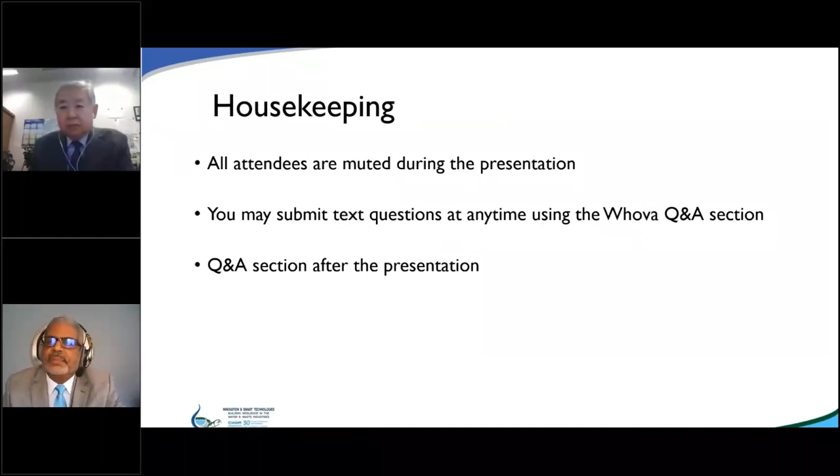Dr. Han, you may now turn your microphone and webcam on. As I see your webcam is on, and you may start your presentation. Many thanks, dear Mr. Williams, for introducing me. Dear participants of the Caribbean Water and Wastewater Association Conference, greetings from Vienna. This is Mr. Bumsoo Han, Radiation Chemist of IAEA. It is an honor and pleasure to present these recent activities of IAEA on wastewater treatment by radiation technology.

So the International Atomic Energy Agency is the world's central intergovernmental forum for scientific and technical cooperation in the nuclear field. It works for the safe, secure, and peaceful use of nuclear science and technology, contributing to international peace, security, and the United Nations Sustainable Development Goals.

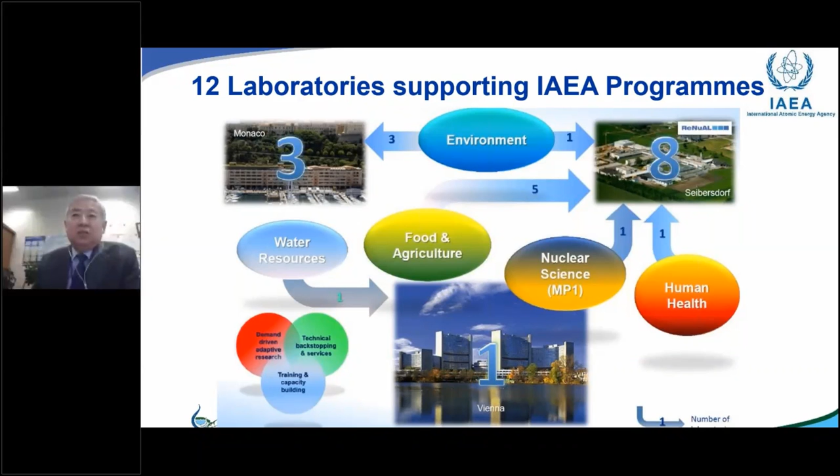The IAEA maintains 8 nuclear application laboratories in Seibersdorf, Austria. They support and implement activities that respond to the development needs of member states in a range of subject areas, conduct applied research and development, deliver training and capacity building to member states, and provide technical and analytical services. The Division of IAEA Environment Laboratories comprises three separate laboratories that together constitute the IAEA's environment laboratories in Monaco. They use nuclear and isotopic technologies to understand and propose mitigation strategies and tools for the environmental impacts of radionuclides, trace elements, and organic contaminants, as well as climate change, habitat destruction, and biodiversity loss.

Pollution occurs when chemicals and other foreign substances leach into the ground, air, and water. These pollutants contain toxins that adversely impact ecosystems and the living creatures within them. Although environmental health and safety groups work to increase awareness of the dangerous pollution present, if pollution continues at its current rate, the future effects could be harmful to human populations and the environment. Water pollution comes from industry and agricultural runoff, and in addition to presenting a danger to aquatic life, water pollution also impacts humans, since the extinction of marine life adversely affects the food chain.

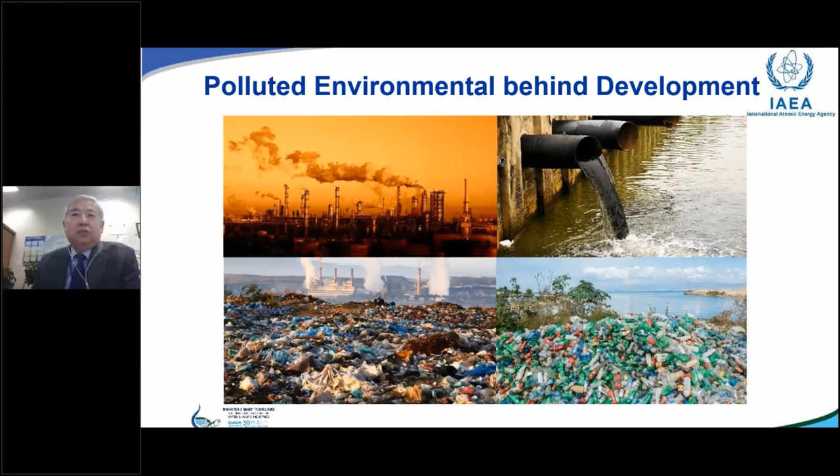As pollutant levels increase, the human exposure to toxins will also increase. The Environmental Protection Agency notes that the exposure to pollutants is directly linked to cancer and heart disease. Pollution, due to its ability to cause illness in humans, can have a significant impact on the world's economy.

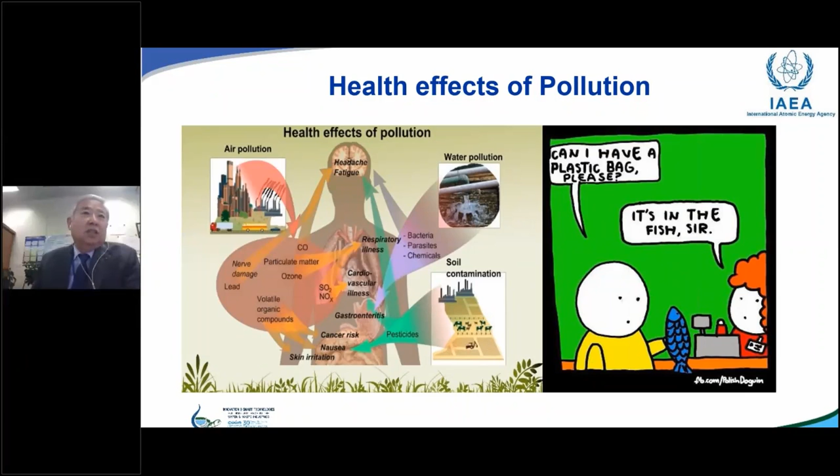The World Health Organization notes that an increased rate of illness due to pollution places a financial strain on many governmental systems and individuals themselves. So, it is becoming increasingly clear that humankind's environmental problems are no longer merely local or regional, but have become continental in scope.

Economically and technically feasible technologies for controlling pollution from gaseous emission and liquid effluent streams are being sought by technologists working in a variety of areas, including radiation technologists. Over the past few decades, extensive work has been carried out on utilizing radiation technology for environmental remediation.

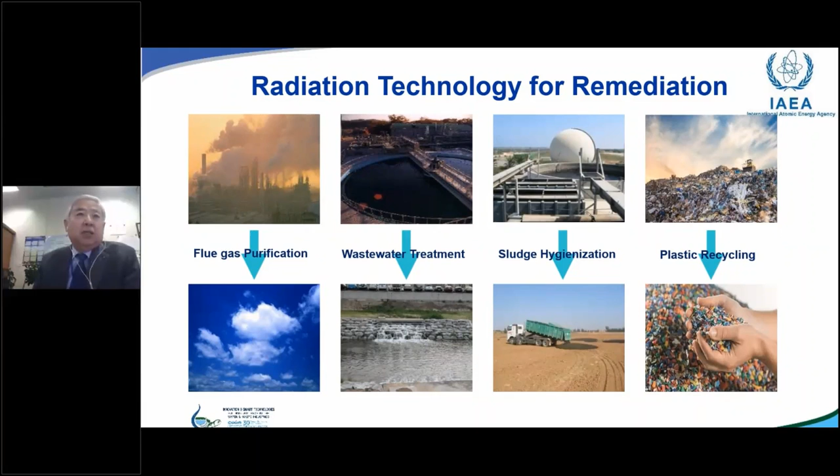This work includes the application of radiation technology for simultaneous removal of sulfur oxide and nitrogen oxide from flue gases, purification of groundwater, treatment of wastewater, hygienization of sewage sludge for use in agriculture, and recycling of plastics for value-added products.

Conventional wastewater and water treatment focuses on the removal of organic impurities, removal of color and odor of effluent, and removal of nitrogen and phosphorus to avoid eutrophication. In comparison, radiation technology provides removal of impurities, color, and odor, and also disinfection of microorganisms, including pathogenic organisms, and

destructs residual chemicals such as persistent organic pollutants, endocrine disruptors, pesticides, and pharmaceutical residues to allow safe discharge of effluent to river or reuse in industry or irrigation.

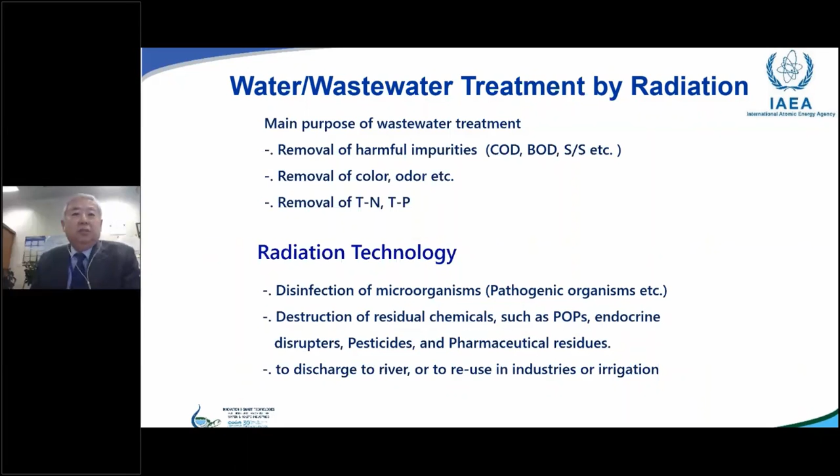The high energy radiation produces instantaneous radiolytic transformations through energy transfer from high energy photons or accelerated electrons to orbital electrons of water molecules. Absorbed energy disturbs the electronic system of the molecule, and this results in the breakage of interatomic bonds.

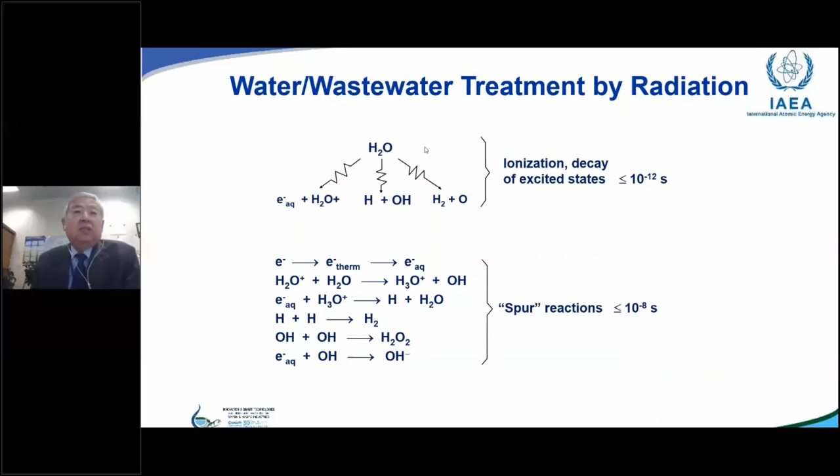Hydrated electrons, hydrogen atoms, OH radicals, HO2 radicals, hydrogen peroxide, and hydrogen molecules are the most important products of the fragmentation and primary interactions. These are the radiolysis products. Radiation processing of wastewater is non-chemical and uses fast formation of short-lived reactive radicals that can interact with a wide range of pollutants. Such reactive radicals are strong oxidizing or reducing agents that can transform the pollutants.

For practical treatment of wastewater, radiation processing offers several advantages. It can provide strong oxidizing and reducing agents, universality and interchangeability of redox agents, a variety of paths for pollutant conversion, process controllability, wide choice of equipment and technological regimes, and compatibility with conventional methods.

The first full-scale application was reported for the purification of wastewater generated at the Voronezh synthetic rubber plant in Russia. Electron beam was used to convert non-biodegradable emulsifier present in the wastewater to biodegradable forms. The Voronezh plant has two purification lines, each equipped with an accelerator to convert non-biodegradable emulsifier present in the plant waste to biodegradable forms.

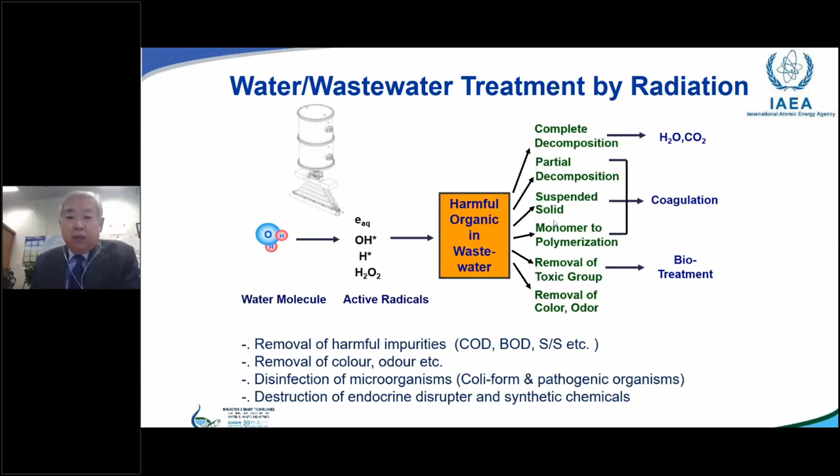So I want to move my slides forward. Okay, now, yes, not too many.

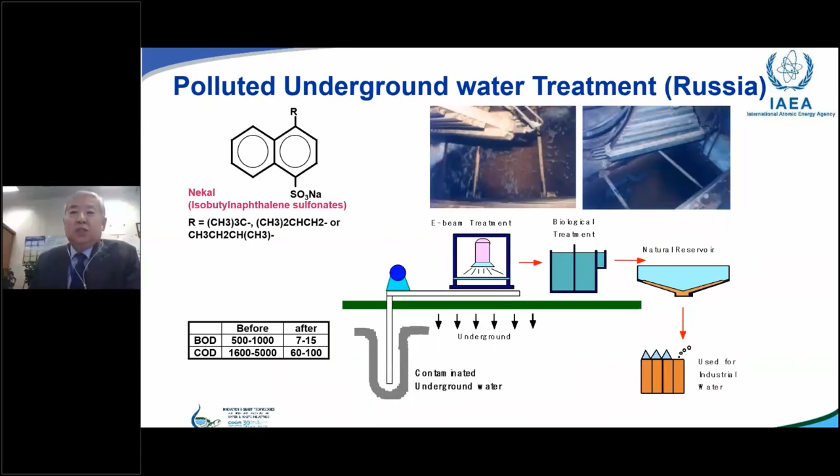The IAEA organized several coordinated research projects on water and wastewater treatment. In the late 1990s, the agency conducted irradiation treatment of water, wastewater, and sludge, which resulted in several pilot-scale operations of wastewater and sludge plants in Korea, the United States of America, India, and Argentina.

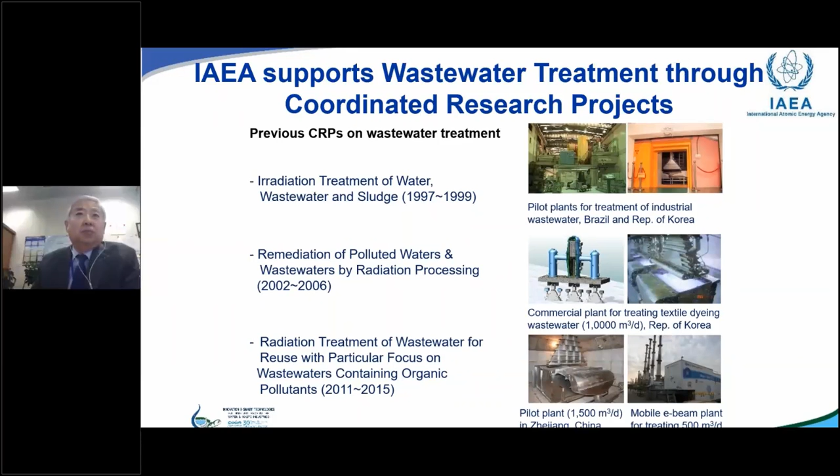The CRP on the remediation of polluted waters and wastewater by radiation processing showed the first industrial-scale wastewater treatment plant, and it is connected to another CRP on radiation treatment of wastewater for reuse, with a particular focus on wastewater containing organic pollutants, with the dissemination of this technology to other member states.

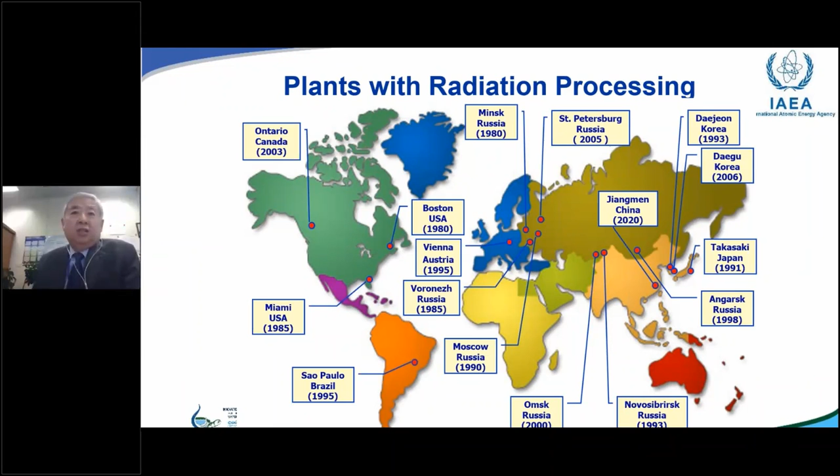The first studies on the radiation treatment of wastewaters, principally for disinfection, were carried out in the 1950s. In the 1960s, these studies were extended to the purification of water and wastewater. Laboratory research on industrial wastewaters and polluted groundwater was conducted in the 1970s and 80s. And in the 1990s, several pilot-scale facilities, including mobile units, were built for extended research.

Extensive study has been carried out on the purification of industrial wastewater by radiation processing, although generally on the laboratory and to a lesser extent the pilot scale. Convinced of the feasibility from the pilot plant, an industrial plant for treating 10,000 cubic meters of textile dyeing wastewater with the electron beam has been constructed and operated continuously since 2006.

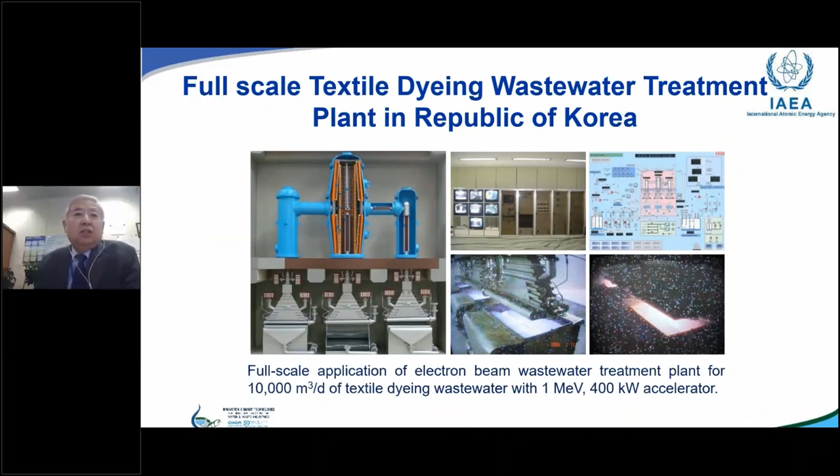This plant demonstrates a reduction of chemical reagent consumption and a reduction in retention time, with an increase in efficiency of removal of COD and BOD up to 30 or 40%. The increase in removal efficiency after radiation treatment is due to the radiolytic transformation of non-biodegradable compounds to more readily digestible forms.

Similar industrial-scale plants are also constructed in China through the IAEA Technical Cooperation Project. In 2017, a pilot facility for 1,500 cubic meters of wastewater per day from a textile factory was built in Jinhua City, China. And later, in 2020, an industrial plant with capacity of 30,000 cubic meters per day from the textile industry was also constructed in China.

The IAEA also supports several different projects for wastewater treatment. The agency supports grafted membranes developed by radiation grafting technology for wastewater treatment to make the technology affordable to small and medium-scale industries in order to mitigate industrial wastewater pollution.

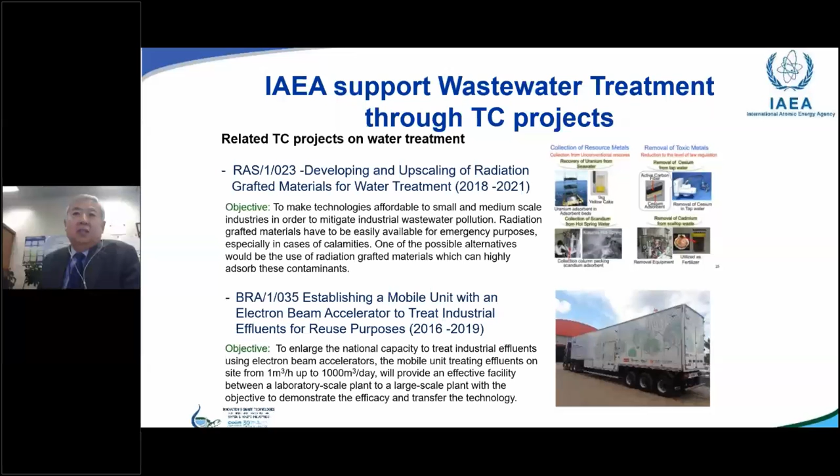The agency also supports the on-site demonstration of radiation technology by supporting the development of mobile EB plants. For example, in Brazil, to establish a mobile unit to treat industrial effluent for reuse purposes. This will provide an effective facility between a laboratory scale and the larger scale plant with the objective to demonstrate the efficacy and transfer the technology.

Attention is directed toward the radiation chemical decomposition of pollutants in groundwater and also to municipal effluent. The wide application of fertilizer, pesticide, fungicide, and other agents in recent agriculture can lead to ground pollution and consequent contamination of water resources. Research aimed at decomposing contaminants, including chlorine-containing compounds in groundwater and polychlorinated biphenyls in transformer oils by radiation, has been done by a number of research groups.

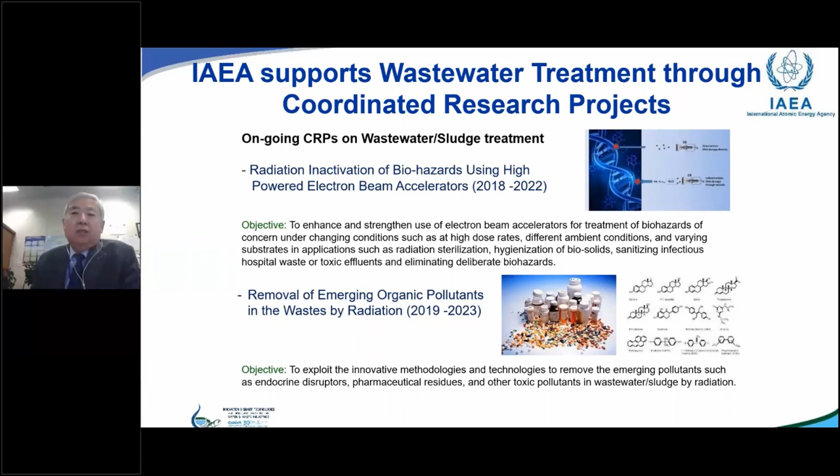The agency organized coordinated research projects on inactivation of biohazards and removal of emerging organic pollutants to exploit innovative methodologies and technologies to remove emerging pollutants such as endocrine disruptors, pharmaceutical residues, and other toxic pollutants in wastewater and sludge by radiation. The study suggests that relatively low doses will be sufficient to disrupt such organic compounds.

Plastics are indispensable to modern life. Plastics generate multiple benefits and conveniences, yet the vast amount of plastics produced and eventually discarded are harming ecosystems, with grave implications for biodiversity, food safety, and ultimately human health. Approximately 70% of all plastics produced to date is now waste, and only 9% of this has been recycled.

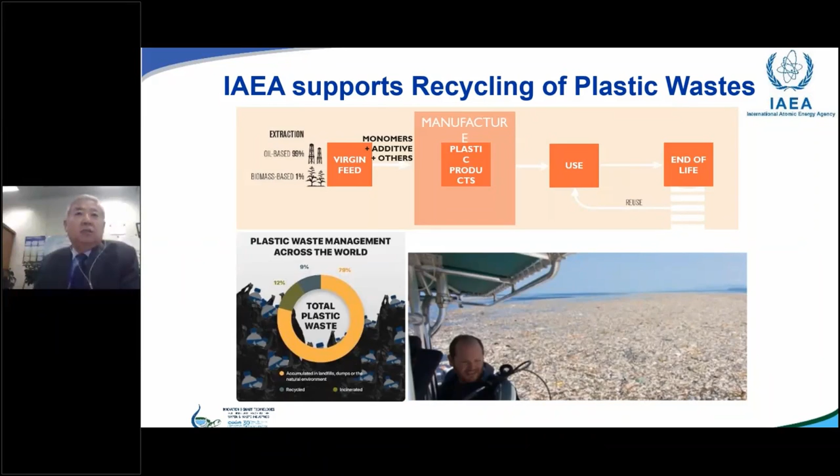Plastic is by design durable, and this longevity means that even as waste, it does not decompose. When it reaches the ocean, it can remain there for hundreds of years, and over time, it fragments and becomes micro and nanoplastic, which can enter the food chain more easily due to its small size. Ultimately, plastic does not disappear, but rather accumulates in the oceans over time. On the current trend, the oceans are expected to contain 1 ton of plastics for every 3 tons of fish by 2025, and by 2050, there will be more plastic than fish.

Radiation technology can be used to transform recycled plastic waste into other products, such as fillers and binders for construction materials. It can be used to break down and convert waste plastic polymers into smaller components to generate chemical feedstock to produce consumer products. Furthermore, radiation technology offers cleaner production and recycling processes, thus reducing the use of potentially harmful additives and solvents, as well as delivering energy savings.

The IAEA has developed NUTEC Plastics to assist IAEA member states in integrating nuclear and nuclear-derived techniques in their efforts to address challenges of plastic pollution, making the IAEA's contribution to solving this global problem more apparent and perceptible. NUTEC Plastics builds on a portfolio of IAEA research and technical cooperation projects around plastic recycling using radiation technology, and marine monitoring of microplastics using isotopic tracing techniques. NUTEC Plastics positions the IAEA on an important issue of global concern, plastic pollution.

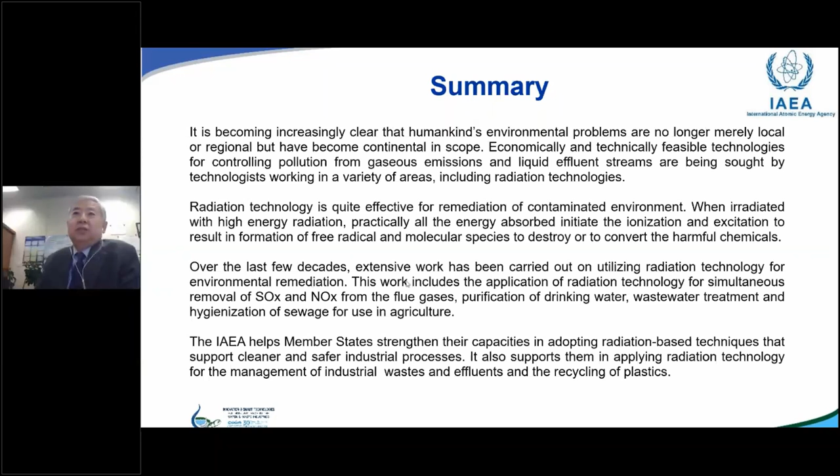The IAEA helps member states strengthen their capacities in adopting radiation-based techniques that support cleaner and safer industrial processes. It also supports them in applying radiation technology for the management of industrial waste and effluent and the recycling of plastics. The IAEA statute mandates it to encourage and assist research on atomic energy for peaceful uses and its practical application. It also fosters the exchange of scientific and technical information and the exchange of scientists in the field.

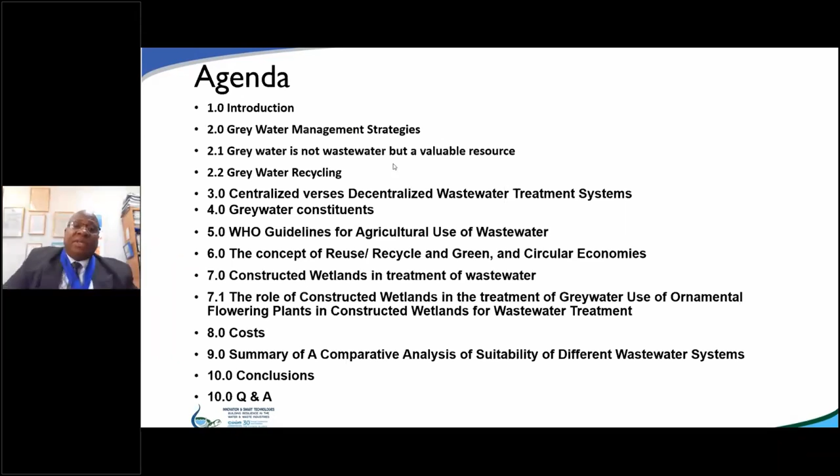I will tell you why the consultants, after a lot of deliberation, ended up with constructed wetlands as the relevant method of treatment. We'll talk some costs. And at the end, I will give you the pros and cons. I'll do a comparative analysis of the suitability of different systems for wastewater treatment and in particular, grey water treatment.

So by way of introduction, grey water, on the other side of the Atlantic, is called sullage, right? It is the spent water after showering, bathing, and doing your laundry. It gets its name from its murky appearance. It's not as dark as sewage, or black water as we call it from the toilets, but it is very much distinguishable from tap water. And let me say from the onset, grey water contains a lower amount of contaminants than black water. And therefore, we have to bear in mind upfront that it could be reused for several purposes in and around the home.

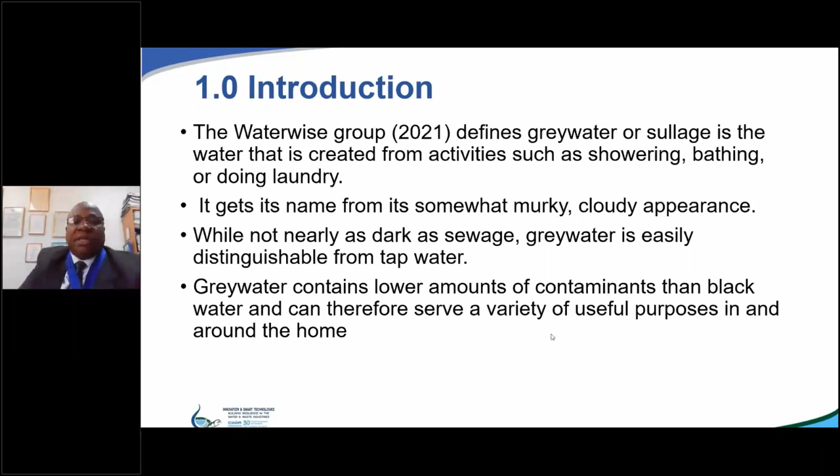In terms of grey water management, I see it back to where I was born in the early 60s. The simplest and cheapest way to recycle is to capture your shower and bath water in a bucket and flush your toilet with it. Another simple way is your washing machine. Catch your washing machine water in a tub, connect your tub to an outlet, and do irrigation of your garden. Grey water can be used for other purposes like washing vehicles, driveways, mopping, and cleaning the sidewalks and staircases, and so on.

Now, we have to bear in mind that the contaminants present in grey water are from soap, shampoo, toothpaste, shaving cream, and so on. And most importantly, you have some organic matter and nutrients. The nutrients I like to highlight are nitrogen and potassium, because in view of recycling and reuse, those are two important elements that usually go to waste when you do conventional treatment.

These constituents don't necessarily harm the soil or plants, but we must be mindful there are some plants that are highly susceptible to salts and phosphorus. So when we apply, we must test the levels of salts and phosphorus before we put them on plants, because there are plants that will be stunted if they have too much phosphorus.

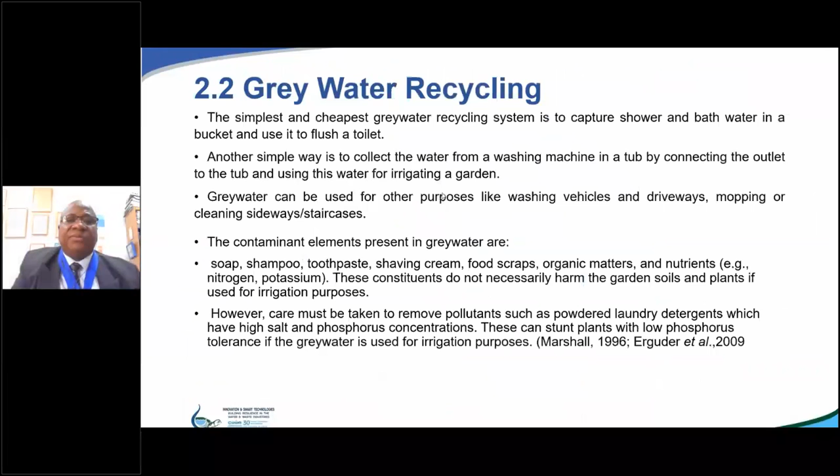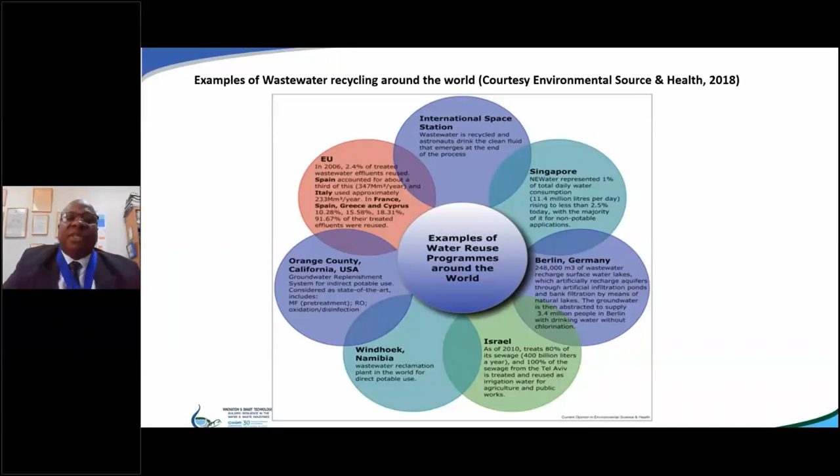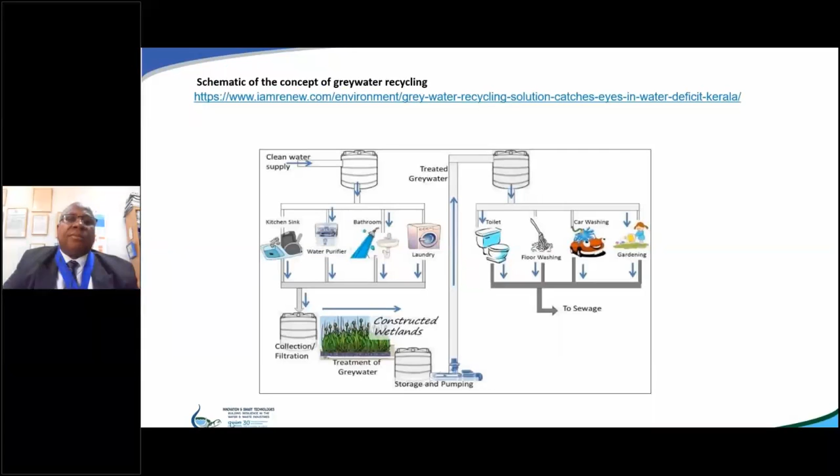Moving on, may I touch on what I call centralized versus decentralized systems? Why? I don't want to waste your time on that, but that is so key in my view to this project. And I said, based on the mandate that we were given, it begs the question, well, why does the city of Basseterre not have a central sewage system? Why does the same situation exist in neighboring St. John's in Antigua? Then I asked myself, home in Grenada, for example, there was a central sewage system built in the 1930s in St. George's, but up to this day, it still serves less than 5% of the population.

Again, when I look at Castries, for example, they have a similar central system. For the last 30 years, they have a broken outfall that has not been repaired. Same thing could be said about St. Vincent and so on. And the short answer to this question is that centralized systems are just too expensive. And the whole traditional wastewater management concept is a centralized one. You collect all your wastewater and you send it to a central treatment plant, right? And that in itself is difficult to adopt in these poor small countries, especially, for example, St. Kitts, Basseterre, as it were.

So to overcome the situation, we're moving away and we're concentrating on what I call a decentralized wastewater system. And we're mindful of that, right? And we're saying with the decentralized system, the solutions of treating the waste should be as close as possible to where the problem starts, where the wastewater is generated. So this is the main philosophy that we follow in designing the system, the work we did, and we are continuing to do on St. Kitts.

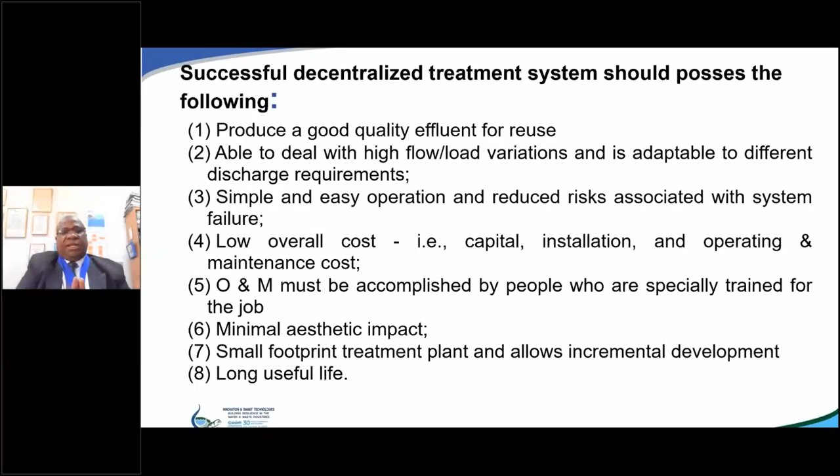And the decentralized system, there's a few attributes. Obviously, it must produce a good effluent quality. It must be low cost in terms of capital, installation, operation costs. And we must be mindful to use the people around the system, well train them to operate the system. We don't want strangers coming from one corner to the next to maintain the system. It must be aesthetically pleasing, and it must have a small footprint, and it must have a long useful life.

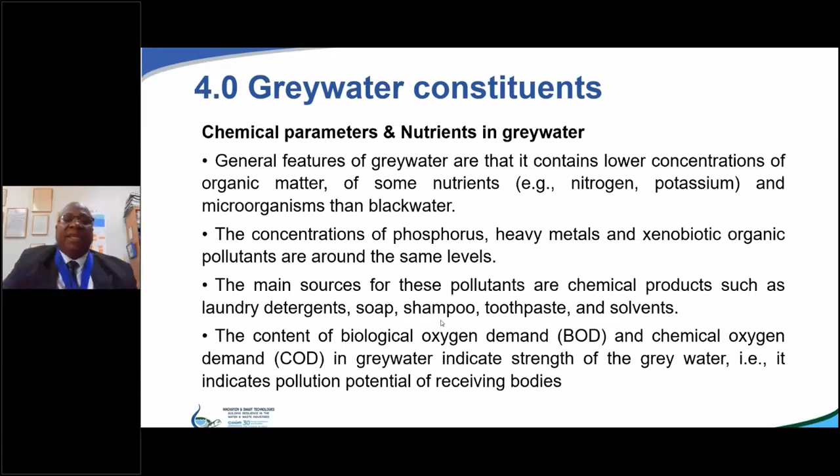Grey water in itself, many constituents. I like to highlight the nitrogen and the potassium. And we have to bear in mind that it has all the pollutants that the other wastewater have, but in a lesser concentration. And again, the main source of pollution in the grey water is the chemical products. For example, the laundry detergents, soaps for having a shower, and toothpaste and so on. And obviously, the BOD and the COD are important factors which indicate the strength of the wastewater, and that is important for our design. Again, these values are less than wastewater in general.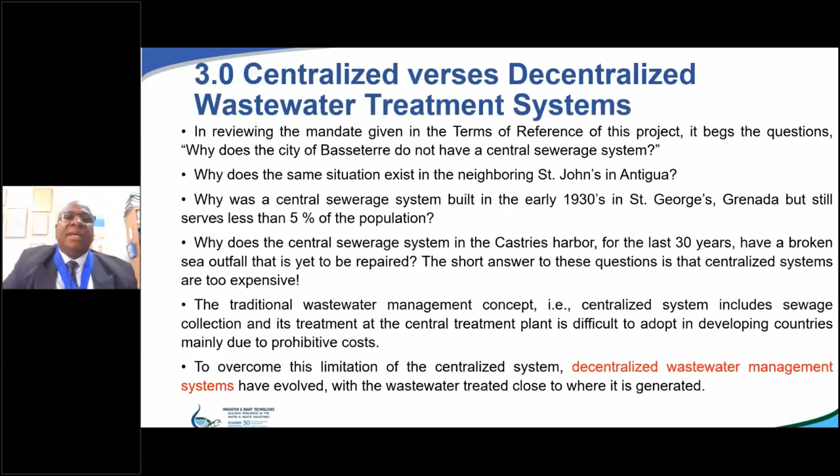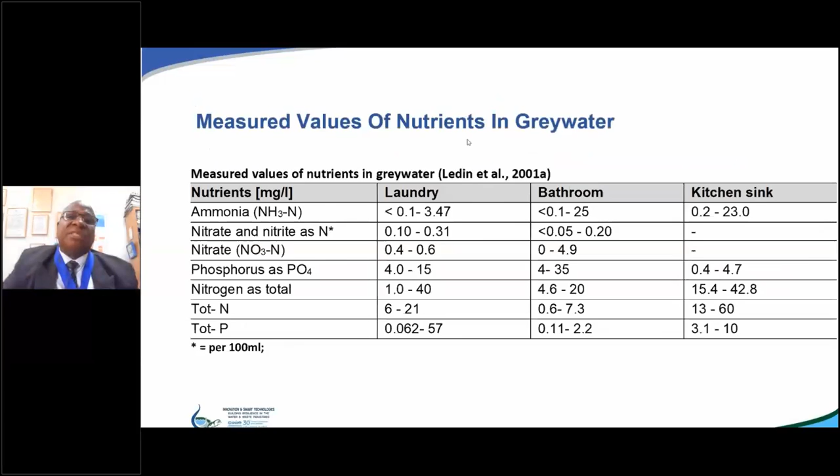I don't know why. Here, if you look at laundry, we break it down in terms of what you get out of laundry, what you get out of the showers, and what you get out of the kitchen. Very well defined. And you know, the kitchen would be stronger in some aspects, the laundry would be stronger in some aspects, and so on. So that is well defined.

Issues of physical properties, the temperature and so on, are well defined also. Obviously, grey water would always be a little warmer because of the showers and so on that you're taking. And we have to be careful because of the heat; the temperature would favor microbial growth and so on. So we're mindful of all of that when we are designing.

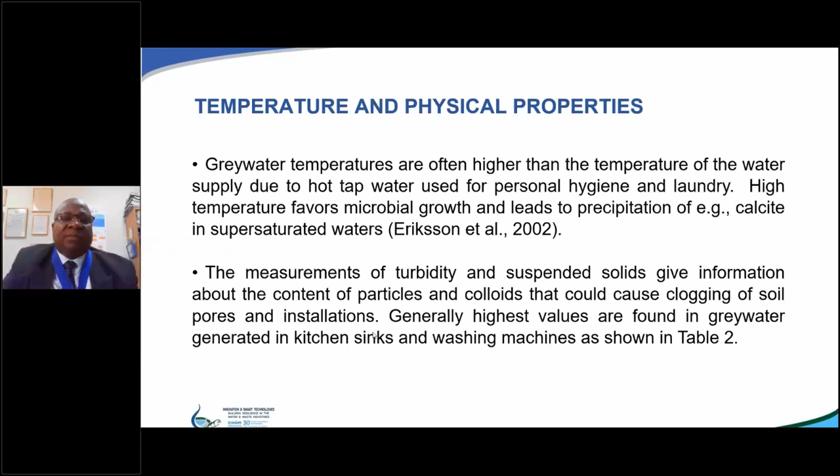Turbidity and suspended solids are very important, and they have to do with various qualities of the system. And we have to bear in mind that these could clog the system. It depends on the colloids and particles that you have entrained in the system. So in terms of physical properties, we throw in color there, and suspended solids, TDS, are very high in the bathrooms, for example, and mindful of the turbidity, we have that range, and the temperature range.

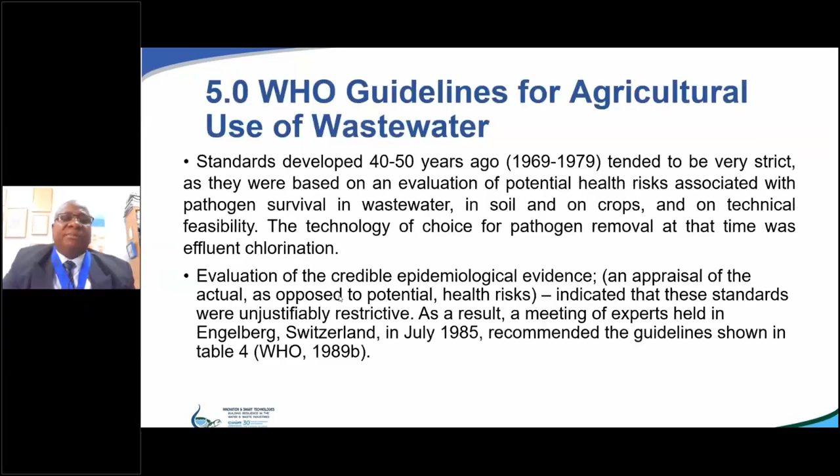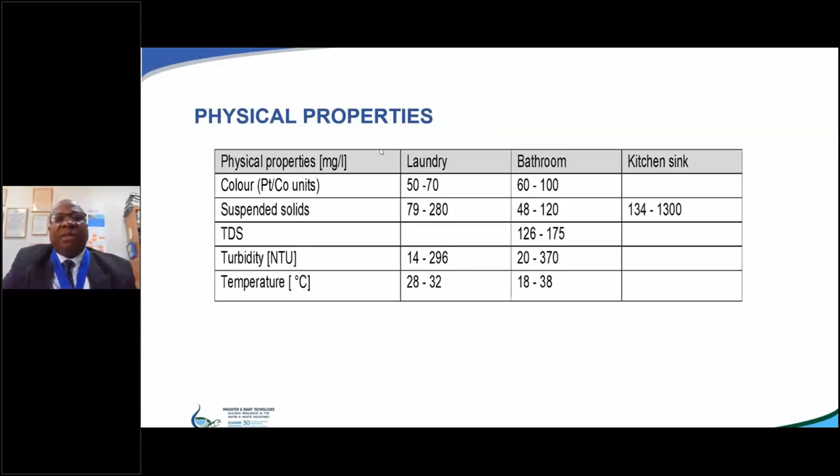So moving on, I want to say that there are a lot of guidelines for the treatment and reuse of, in this particular case, gray water in agriculture. Let me also say that what we found historically, the WHO guidelines were very stringent. 40, 50 years ago, the guidelines were very stringent in terms of what they asked for to apply on plants. At the end of the day, though, they had to review it, because the concept they were using in terms of reusing for irrigation just couldn't apply to the poor developing countries.

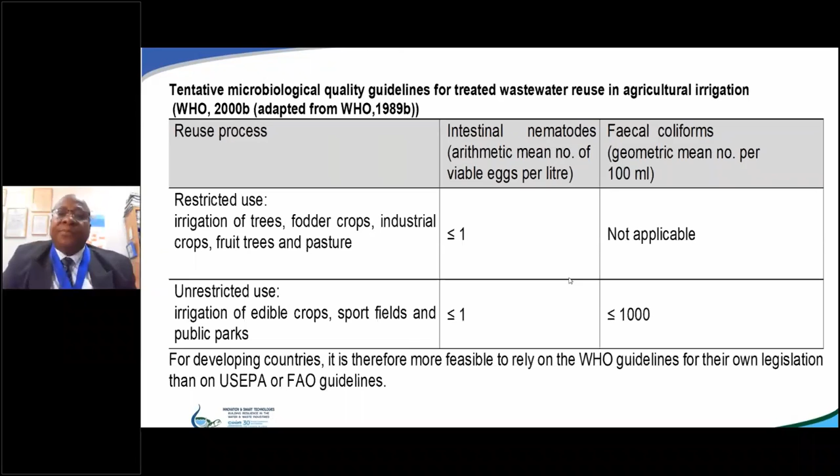So I have a table here which is important, and it's divided into restricted use and unrestricted use. Obviously, restricted use is for irrigation of trees and fodder and so on. For example, you see the fecal coliform is not relevant there. Yes, intestinal nematodes, less than or equal to 1 per liter, is important. When it comes to unrestricted use, where you have edible crops, both are valuable: less than 1 nematode egg per liter, and they also stipulate less than or equal to 1,000 fecal coliform colonies for every 100 milliliters. So we follow these WHO guidelines rather than the stringent ones of US EPA and FAO when it comes to our developing countries.

Quickly, the whole concept of recycling, the green economy and the circular economy. Now, I want to mention the household-centered sanitation approach that was developed by the WSSCC in 1999. Among other things, it specified that solutions for any urban environmental sanitation system should take place as close as possible to the place where it occurs. And waste, whether solid or liquid, should be regarded as a resource. And the UESS system should be circular. It should be designed to minimize inputs and reduce outputs. So hence, the household-centered environmental sanitation system will be a household-centered planning approach.

Everything will come from consultations of the stakeholders, mostly in the households, and they would offer solutions to solving the problem. And as we say, we want to solve this problem as close as possible to the source where this wastewater is generated. And the circular economy concept is to reduce. It's away from the traditional linear model where you produce, you use, and at the end you dump, and you end up in the landfill. Here we're talking about circular, where we're trying to minimize the inputs as best as possible, get out of it nutrients that could be recyclable, and have a nice, happy circle where the environment will be better off. So the consultants are bearing that in mind in pursuing the job also.

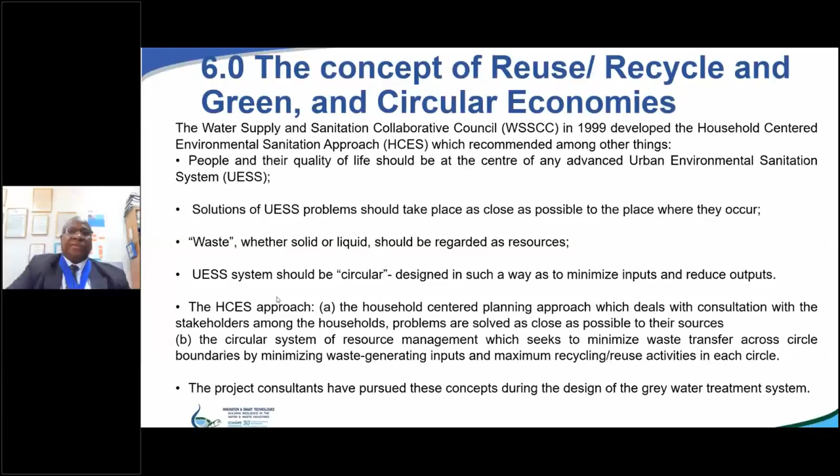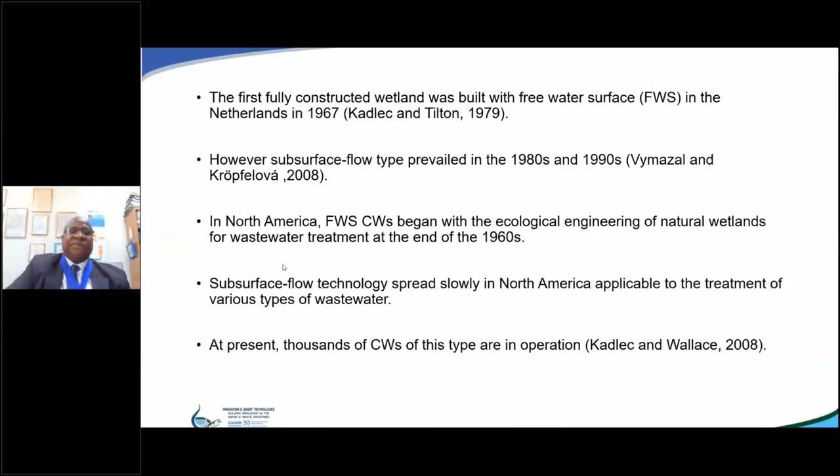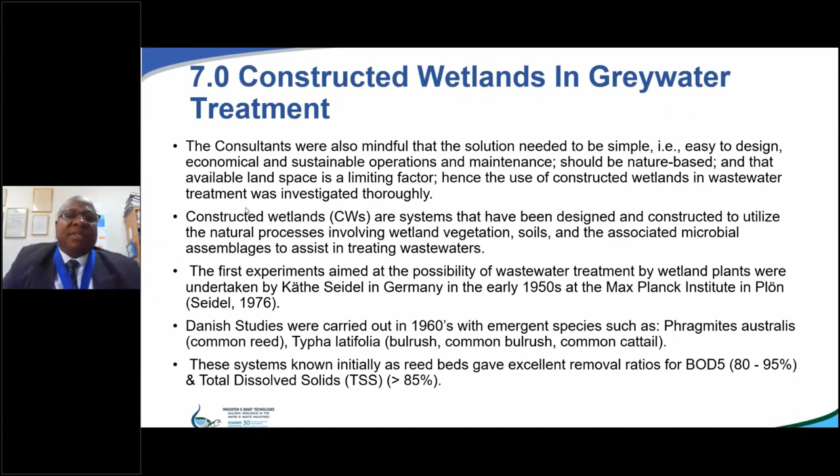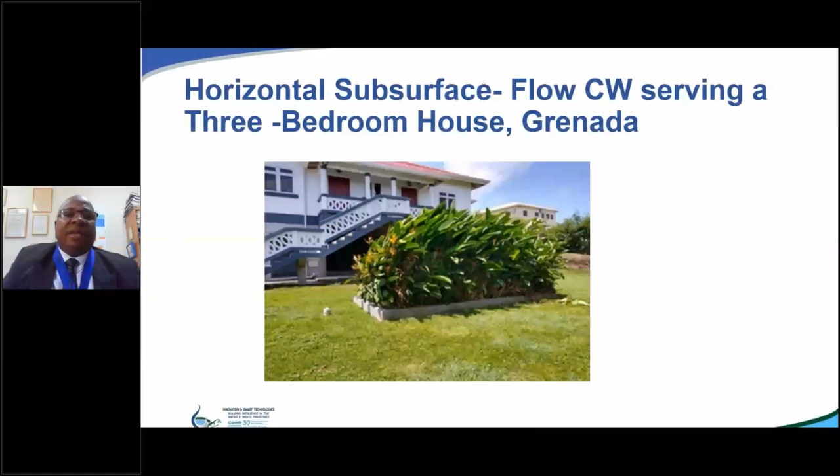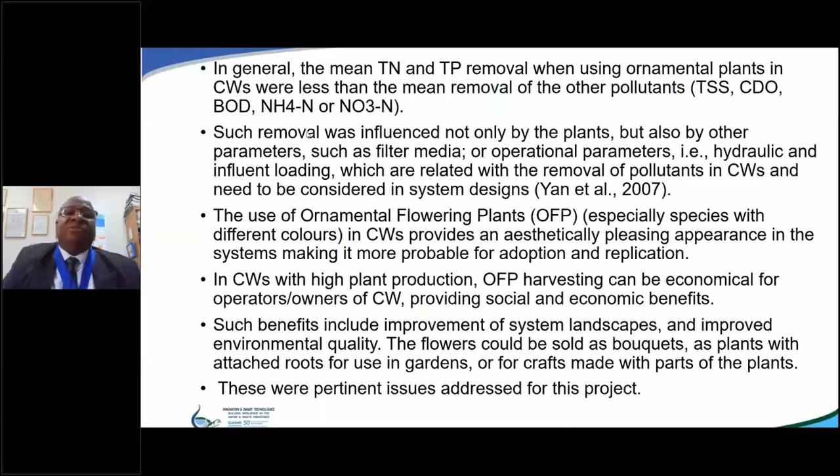Let me say though that I want to talk about the ornamental flowering plants. Sandoval and a group of engineers based in Mexico did some wonderful work. Apart from just the reeds that were used early on, they decided to use ornamental plants and see what they get of it. In the study they found out that 4 ornamental plants made sense: the canna lilies, I have them growing close to the office, the iris, the heliconias, and so on, offered even better removal ratios on the wetland systems when they are used.

Before we go into cost, let me just run that over. Somehow the slide's giving a little trouble, but we'll get there. Right.

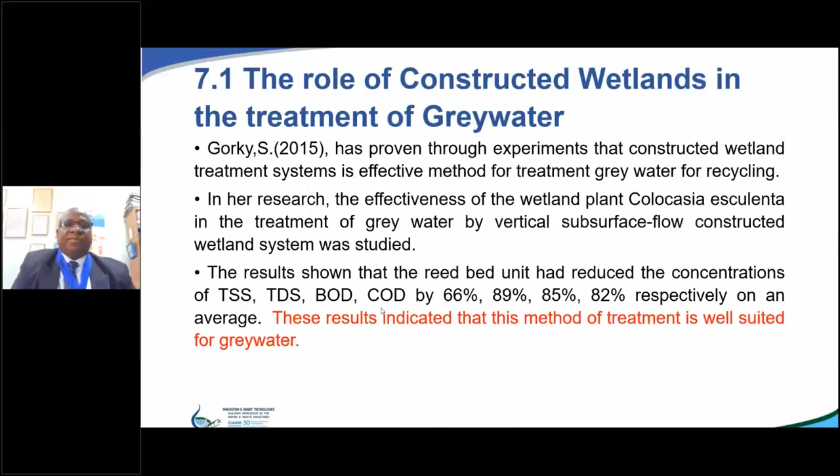In terms of costs, we found out the cost could vary dramatically across the divide. First of all, you start with the type of system you want to do. And this gentleman here in 2008 summarized it nicely. We talk about horizontal flow systems, which are most prevalent. They looked at what was done in the US, Czech Republic, Portugal, Spain, and so on, and found that the excavation cost varied between 7 and 27.4% of the total capital cost.

When it comes to the gravel that was put as a media into the system, they get a variation of 27% to 53%. If you have a liner, you're talking 13 to 33%. In terms of the plants that you choose as the emergent species, 2% to 12%. Plumbing, 6% to 12%. And the control structure is 3.1 to 5.7%.

Now, the total investment cost may vary also. In our studies, we realized that if you start from India, you're talking about $29 per square meter, and that was information from 1999, $33 per square meter in Costa Rica, and so on. And it could be as high as 257 euros per square meter in Belgium.

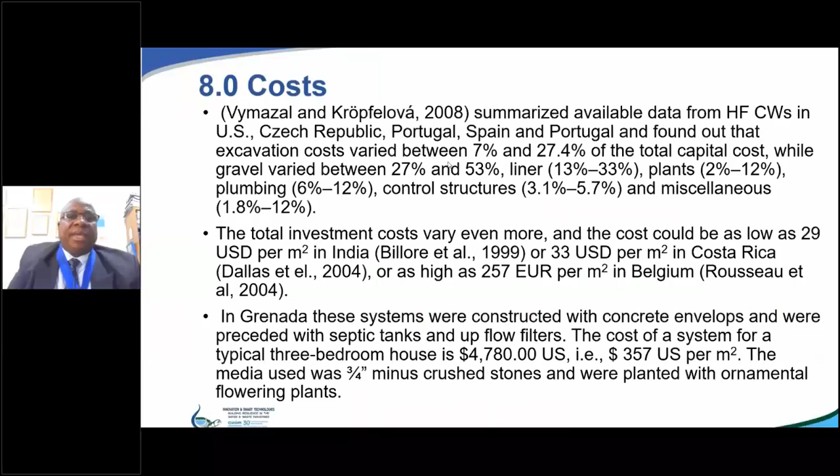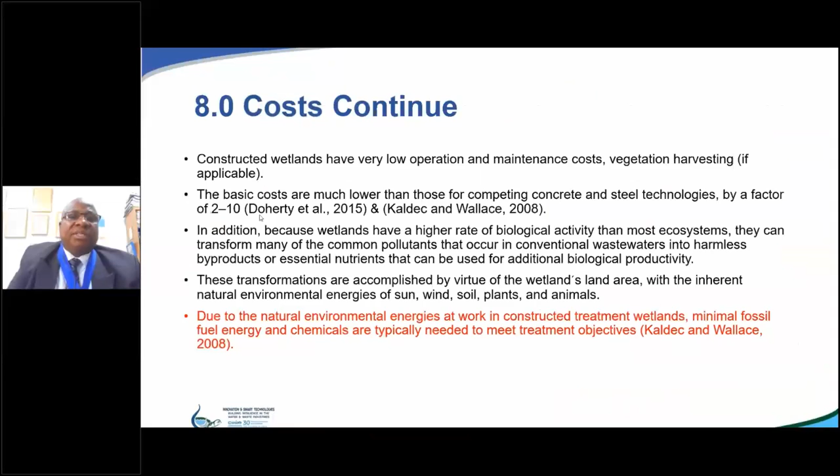After this cost here, we did a summary, which I could go into now. For details, you'll follow the paper. It's there. We did a comparison with the traditional septic tank and filtration system and typical package systems, because we looked a lot at the package systems that they offer. A lot of MBR systems with filtration.

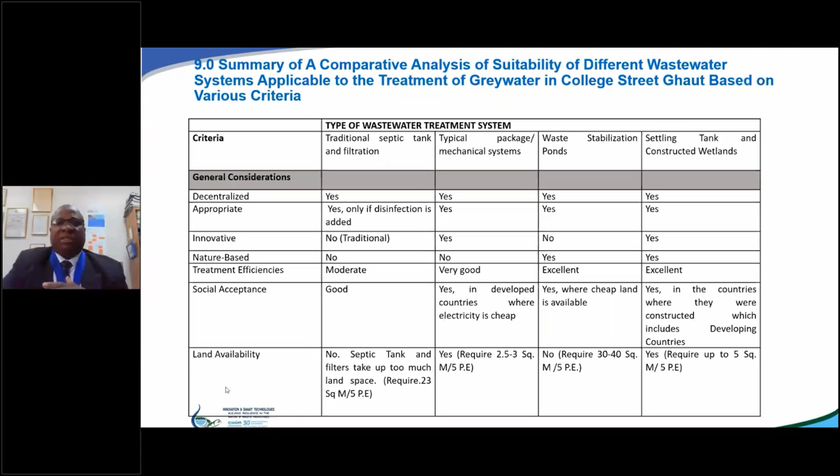Yes, they are compact, but when we started looking at them as a solution, we asked ourselves, could these really work? Could you get individual households to purchase those systems and maintain them? Because they are energy intensive. Some of them have blowers. You have to push through membranes. You're talking electricity costs, and electricity is not cheap at all in the Caribbean, where we use fossil fuels.

So we did that. We weighed against waste stabilization ponds, and we also weighed against the settling tank and constructed wetland, which is what we ended up with. And we did general considerations, which we were able to compare. Is it appropriate? Yes. And innovative, and so on. And we broke that down. Waste stabilization ponds obviously weren't applicable, too much land. Treatment efficiencies, we looked at.

Septic tank versus settling tank, for example, moderate versus excellent for the treatment system. In terms of social acceptance, in the countries where they are constructed, yes. And we did a whole host, as I say, when it comes to land, which is very crucial in the decision making. With septic tanks, for example, you're talking about 23 square meters per 5 PE, versus the wetland system, which only needs 5 square meters of land to treat a household of 5 persons.

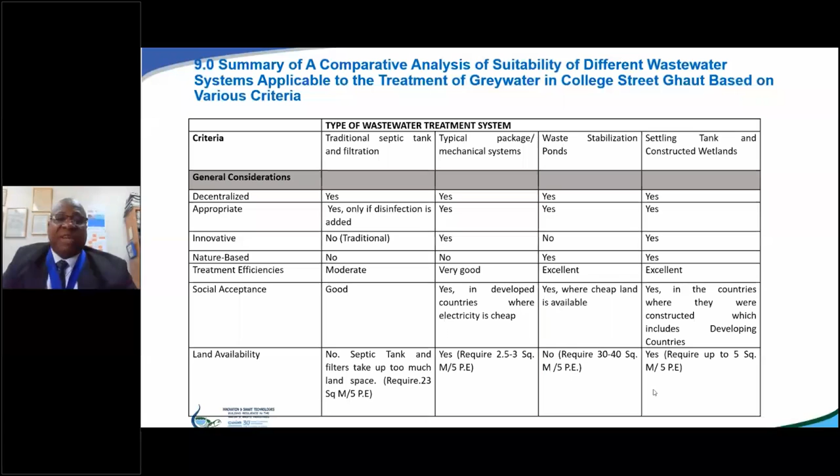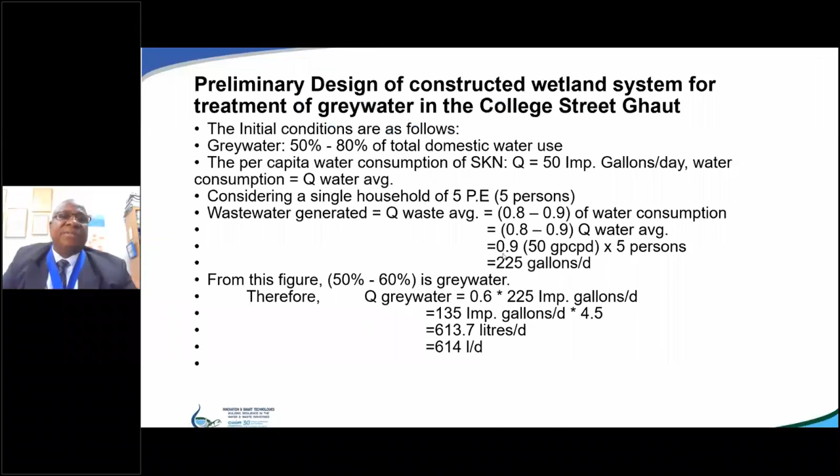We also looked at financial, public health, and, in terms of environmental, the possibility of recycling. Yes, you have it in the 3 of them. The energy use: for the settling tank and constructed wetlands, almost nil in some cases if it's gravity flow. Reuse and sludge were all looked at. Eutrophication potential of the effluent is very low for constructed wetlands.

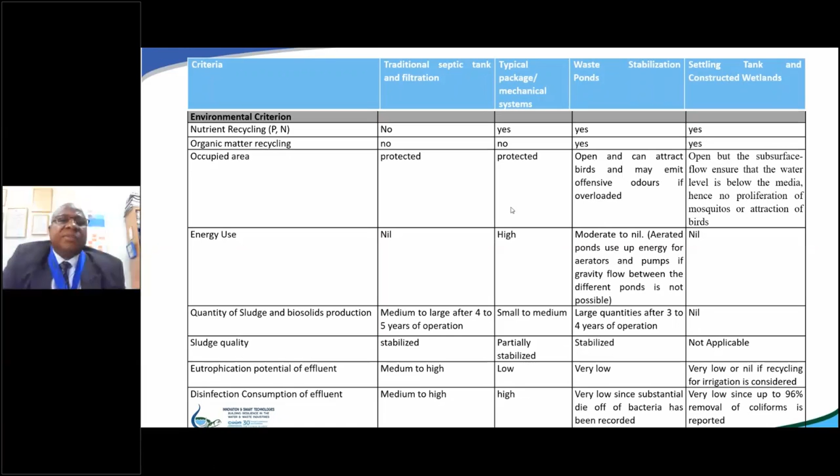In terms of public health, we were able to assess all the systems, also the acceptance again, and we found, for example, the potential for reuse. The settling tank and constructed wetland give excellent quality for reuse and irrigation. And also the capital costs. We had the capital and the O&M costs.

We could look at the summary here to compare, for example, the mechanical systems at $13,600 US in capital to treat the waste from a household of 5 persons. You're talking 13,600 versus 3,995 for the constructed wetland. And the life expectancy of these systems is between 50 to 80 years. Again, we can't stress enough that operation and maintenance is very low, very minimal.

So this is where we are, and we have the last slide, which doesn't want to come up, but for some hitch, it's going to come.

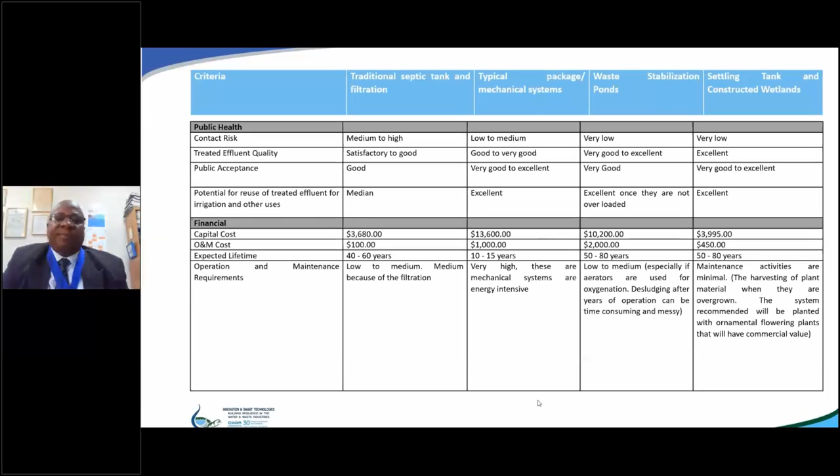Okay, so concluding, in viewing everything, one of the things that stuck out is that there's not enough land space to accommodate systems. For some of the systems I mentioned, land space is a critical factor. We also viewed that for the system to survive, the necessary skills to operate it must come from among the households. This was paramount in our minds.

And we remembered that all the commercial systems we looked at, the package plants and so on, were energy intensive, with a lot of moving parts. So that rendered them not sustainable for this project. The commercial systems are also not nature-based, and the mandate we got in the terms of reference was that the system we settled on should be nature-based and considered sustainable.

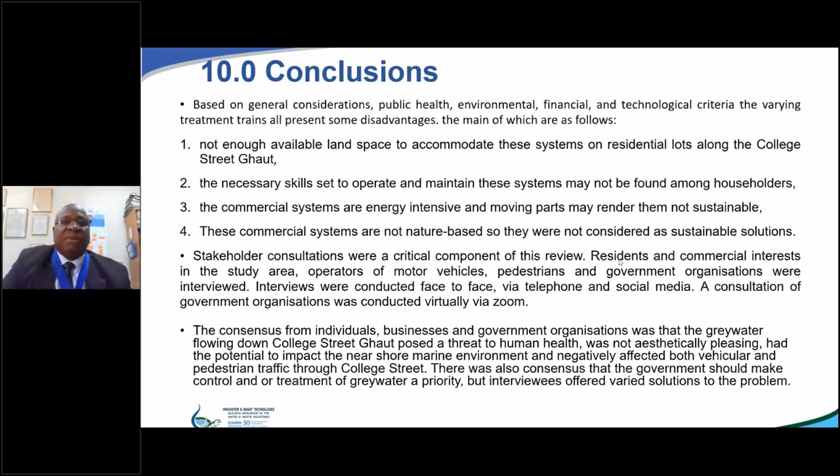And then we did a comprehensive consultation with all and sundry in and around the Ghaut that are affected, and they all agreed that greywater going down the Ghaut is a nuisance; it impacts the environment negatively, public health, life, vehicular traffic, and so on. And they would support, likewise the government officials, that something should be done to alleviate these problems. So we have a design here, which is theoretical.

It was based on the organic loading, but we came up finally with a system. One of these, which you're looking at here, would treat a household of 5. But for the pilot project, we decided to design 3, so we could compare the results. Here we did a vertical, we did a horizontal, and we did a third one, which is horizontal, where we could maybe not put plants.

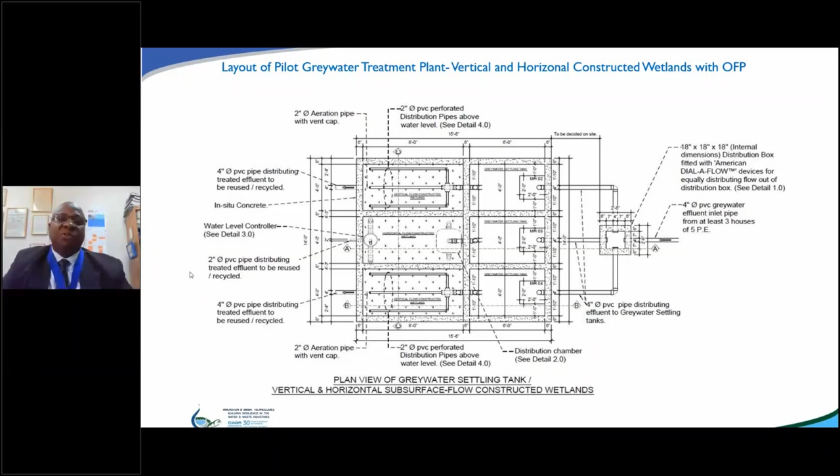These would have plants, and we could compare with results that we will get when we have ornamental flowering plants and when we don't have. So that's what it is. We just costed the system, and we're looking at 75,000 EC dollars to construct that pilot plant. So this is what I wanted to share with you.

Remember, my mandate was nature-based, keep it simple. We apply the KISS principle, keep it simple and sustainable.